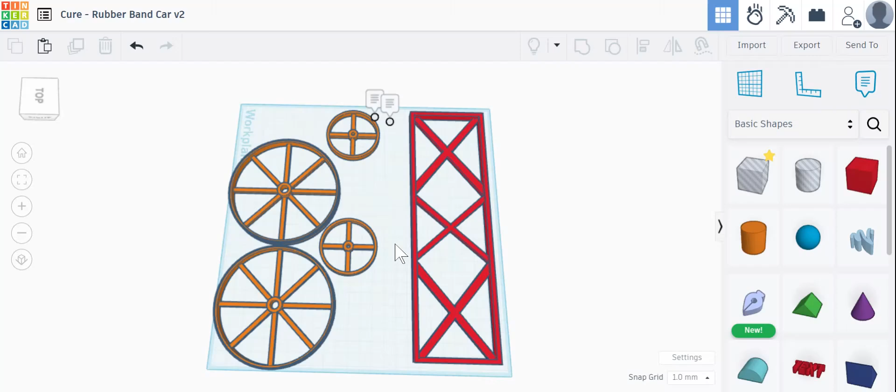Okay, we have our chassis and our wheels. Now we are going to make axle holes and axles. This is where our notes come in important, because the front is 4 millimeters and the back is 8 millimeters, and we need to make the axle holes through the chassis 1 millimeter bigger than those.

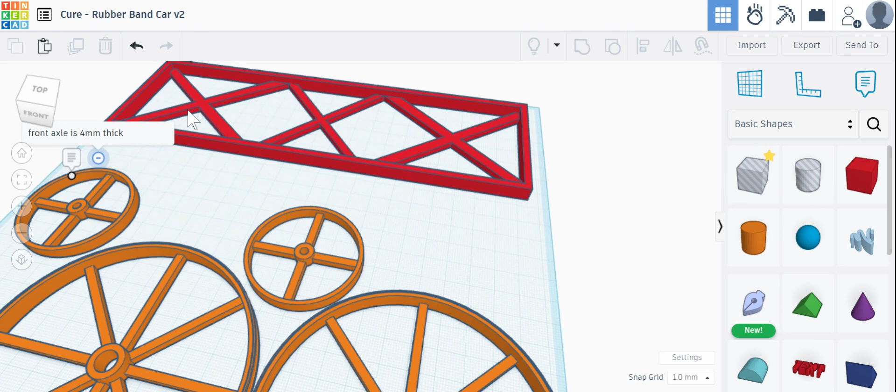We're going to add a little spot in the back so the back wheel axle is a little higher. This way our hook stretches across a little higher, so it's out of the way of the frame when we are twisting up the rubber band car. So let's do a sketch.

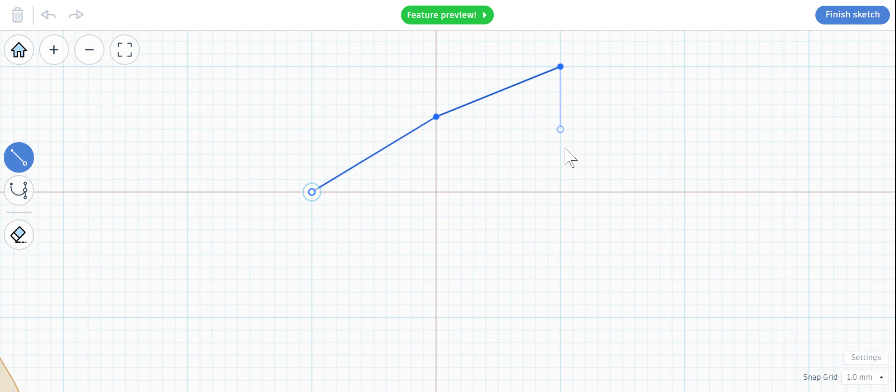We'll come in here. I'm going to use this, if my snap grid's set to 1, okay. So we'll do something like this for the back. We can use this little tool here, click on the line and make it... oh, I don't want that. Let's do Control Z. Stretching it weird, okay never mind. We'll just go ahead and do this, stretch it here, that's what I wanted.

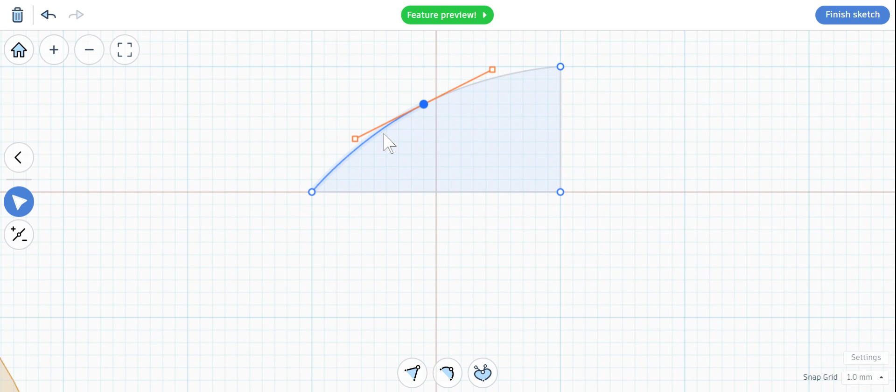So click that center vertices and then you'll stretch it out. Finish sketch. Cool, now we have this shape.

This can go on the back. If you guys remember from the other videos, the edge of this is 3 millimeters thick, so we're going to make this 3 millimeters tall, and then we're actually going to flip it 90.

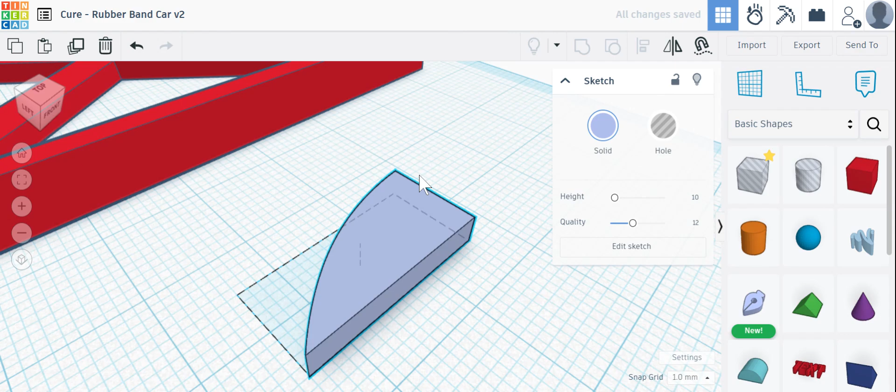I press D so it's on the build plate. This is 7 tall, check over here, 7 tall, which means this is going to go up 7, so we can drag it up 7 millimeters.

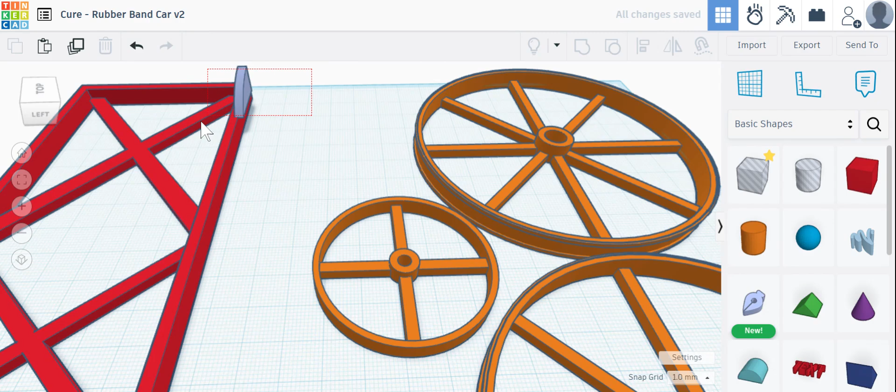And then we're actually going to, I think if we do this, click both, hit F so it's centered, zoom in over here, hit L, line it up with this edge and line it up with this edge. All right, now we have it lined up in that back corner, which is a nice spot for the axle to go.

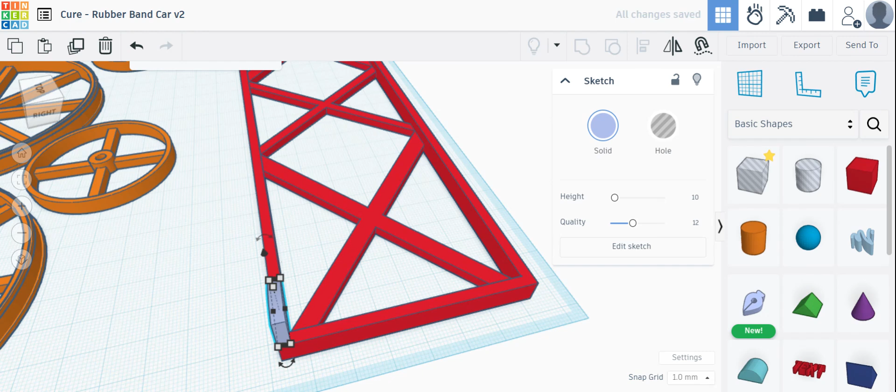The other thing we're going to do is Control D to duplicate this, use my arrow keys to slide another one across there. First, I'm going to group this.

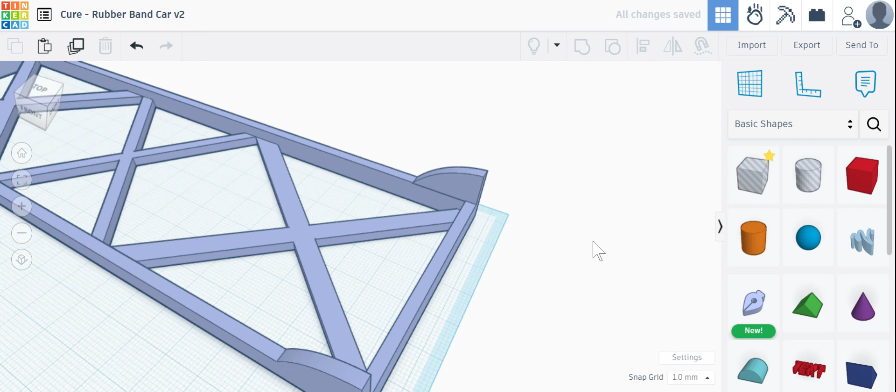Let's do it this way, just so we know for sure it's lined up. Then I'm going to hit L, hit on that edge and on this edge, so now we know it's on that back corner. Group them. Perfect. Now we have a spot for our back axle hole to go through.

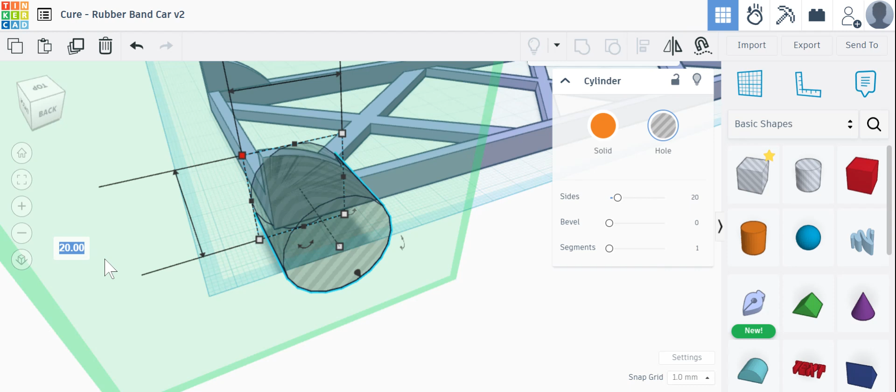So we're going to grab a cylinder that's a hole actually, and we're going to set it here. Doink, right there. We want this, I hit F so we can center it here. Slightly bigger - our back axle is 8 millimeters, so we want this to be 9. Tab, 9, Enter. We can go ahead and move this maybe right there.

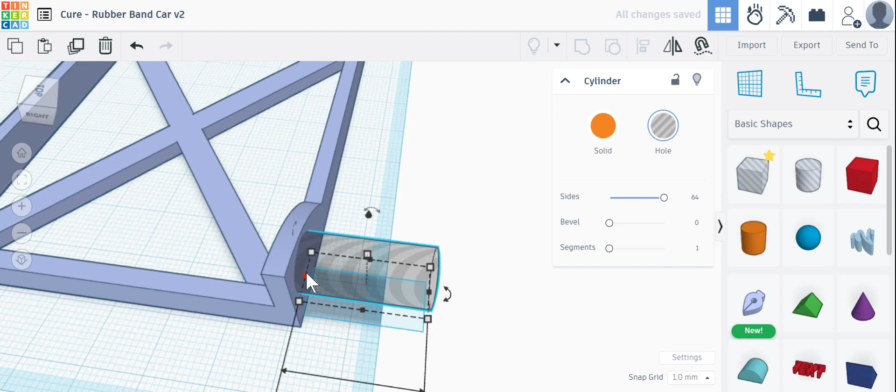There's no real specific spot, it's just whatever looks good. Okay, we click off of it, and then we want to make sure the sides are 64, and then we want to drag that through. That looks good, and then we'll go ahead and group those.

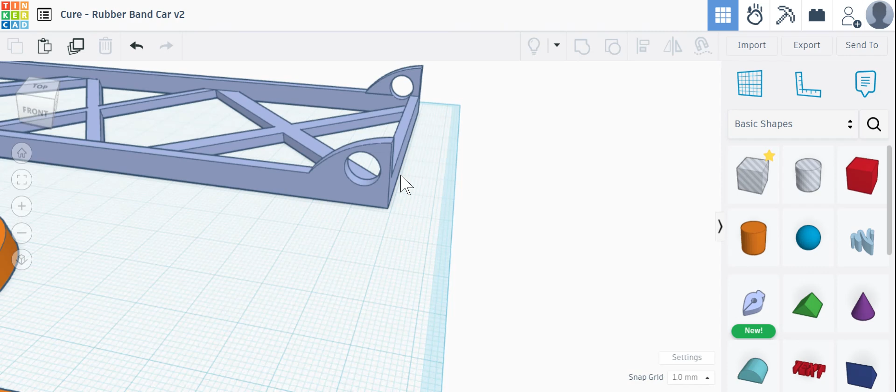So now you have a back hole for where your axle could go. It could be a bigger thing, this is totally fine, it's just where the axle is going to spin. It should be 9 millimeters because it's going to be bigger than the back axle itself.

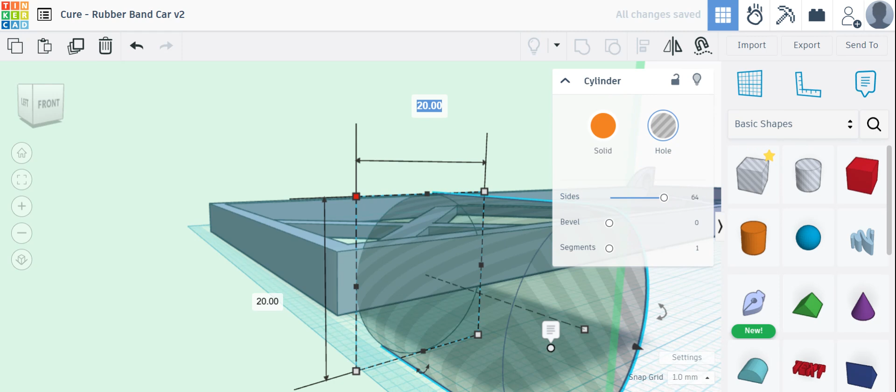Perfect, and then we can go hit F, come up to the front. We could do a little piece up here for our front axle, or you could just take the front axle and throw it through the car somewhere here. We'll switch the sides to 64, which is what I'm going to do. The front axle is 4 millimeters, so we're going to make this hole 5, so it rolls through just fine.

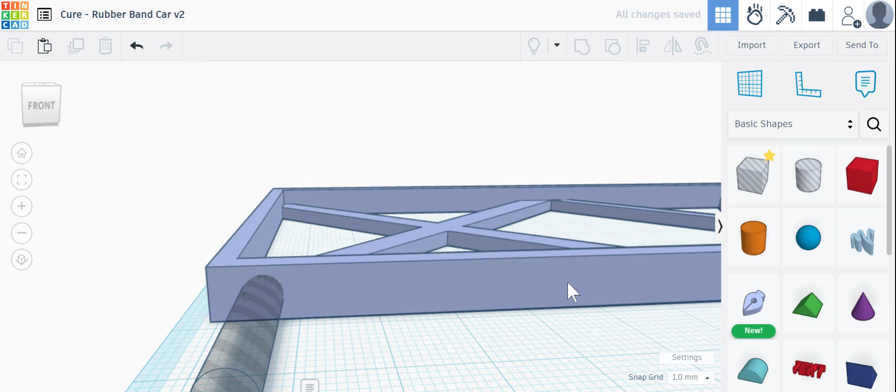And the way I'm getting this plane is when you click this, if you just drag it to the shape and where you want it to go, it'll choose that as the plane it's going into. That's how it ends up on the side. Normally we've been dragging out the pieces just like this.

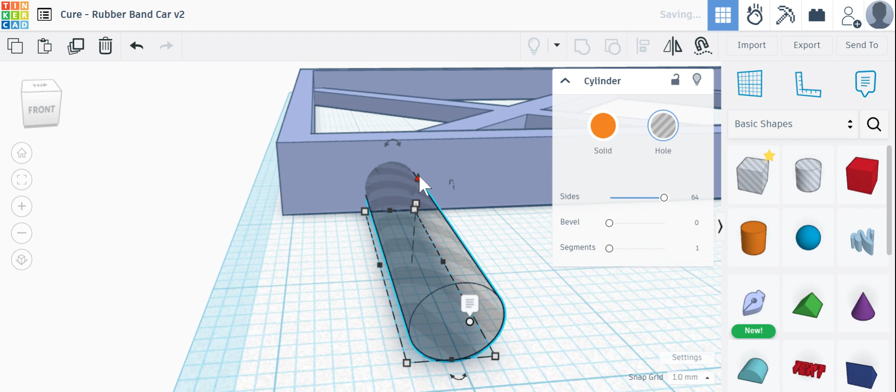Anyways, we got a spot for the front axle to go through, which is fine by me. We could, if you wanted, maybe move this a scooch forward. I'm gonna hit D, see where we're at on the build plate. I know this is 7, this is 5, so I'm gonna just come up 1, so that way I know it's centered between the top and the bottom. So it's 5, 7 total, so there should be 1 millimeter, 1 millimeter. That might be a little thin, but we'll try it, we'll see how it looks.

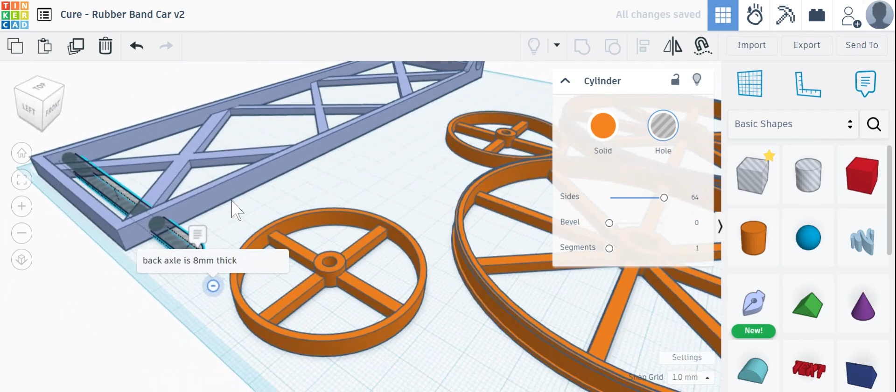All right, squeeze it through. It doesn't matter if we're cutting out. Well, yeah, here's what we're gonna need to do. Here's where I don't like it. We're going to change that. I don't want it to cut through our chassis frame there, so we'll lose some structure.

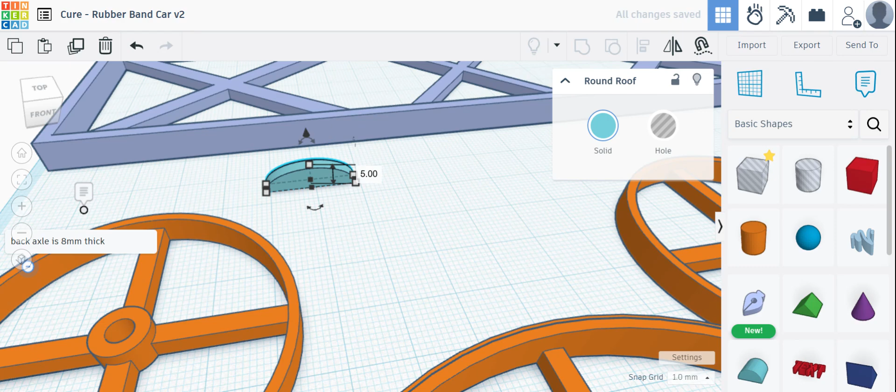So let's go ahead, let's do a semicircle on the front. So semicircle, we'll make it 10 high, 20 wide, and then we'll make it a width of 3. We could even make it shorter if you want, maybe make it 5, just to give ourselves a little bit more space. We're going to drag it up to 7, which is the height of the chassis.

We're going to go ahead and select what should be 2 pieces. We're going to hit L, and we're going to line it up in these front corners, here and here. There we go. We're going to drag both. Oh, sheesh, okay, now we're going to have to do that again. Whoopsies, let's not do that again. Grab those 2, Control G to group them.

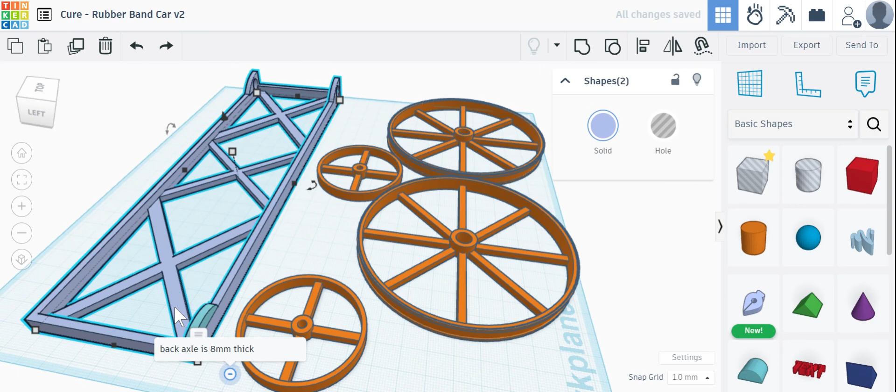Just trying to get a better angle here, sometimes they get all mixed up with the way things look. Okay, we're going to ungroup it for a second. Control D, duplicate, I'm going to slide this over. It should, in theory, line up right on that corner.

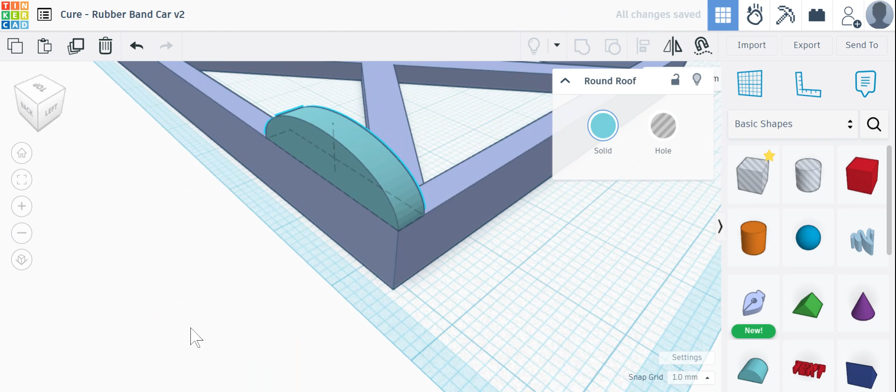Cool. Now we're going to group it. Now I'm going to go back to my axle hole. All right, coming back. Boom. We go 5, 5.

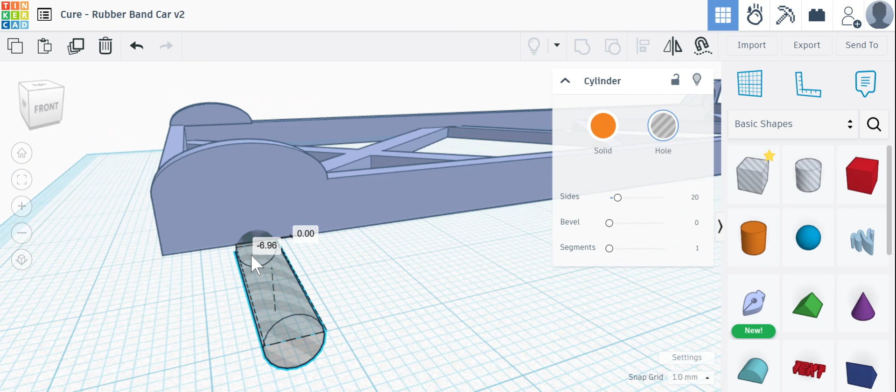This is going to be a little higher now, let's try and kind of center it here. Even a little higher is probably fine. Cool. Whatever looks good.

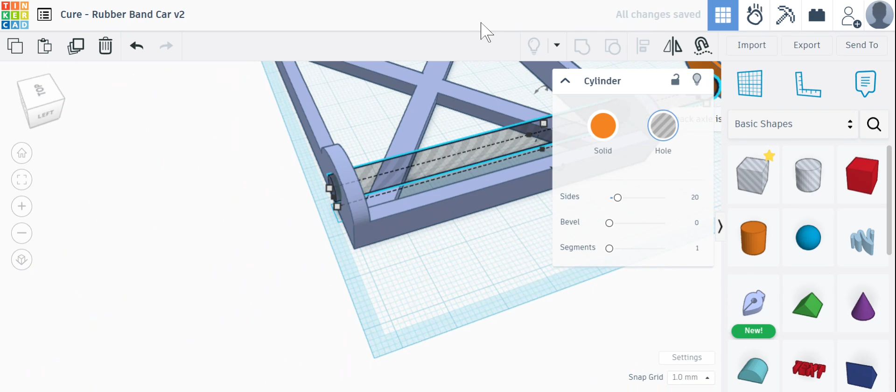Drag it all the way through the other side. Make sure it's through. Grab both shapes, should be 2 shapes. Group it. Now you got your axle holes.

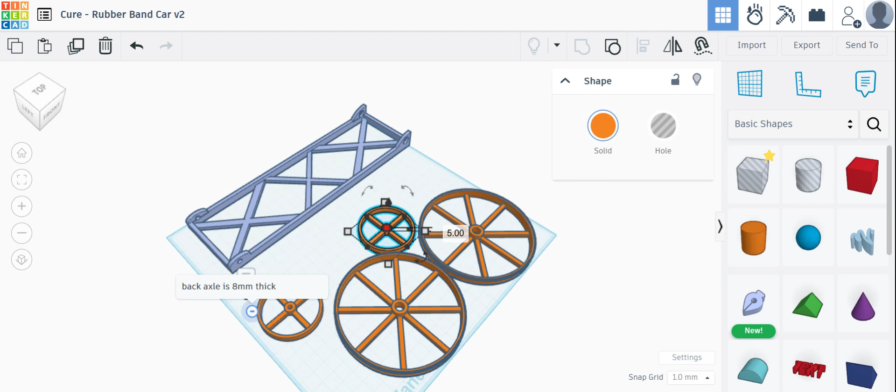Okay, now all that would be left would be to make the axles. So we know the width is 70. The front wheel is a height of 5. So 5, 5, and 70 is going to be 80. We want about 1 millimeter to our space. So we're going to make the back axle, remember, 8 millimeters thick.

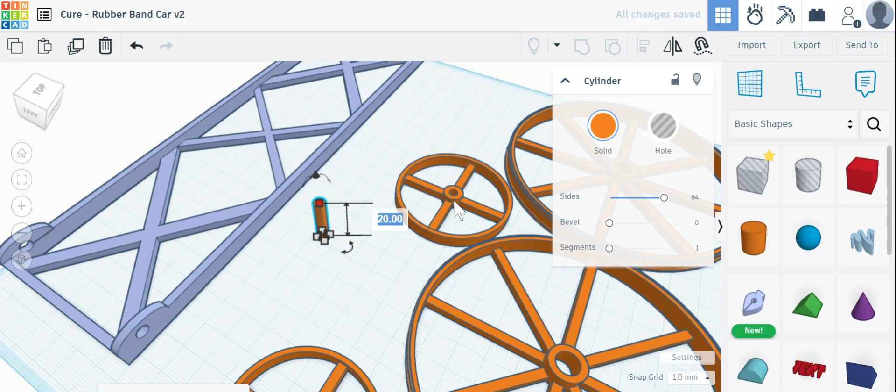So we're going to pull out a cylinder, go to 64 sides, it's going to be 4 by 4. And this height, we're going to make it, it's 80. We'll go 82, which would put us at the width of the car through the wheels and then give us a little bit of extra space so the wheels are spinning freely through the axle hole. Remember, this hole should be 5. This width is 4, so it'll tightly fit on the wheels, but it'll spin through this frame.

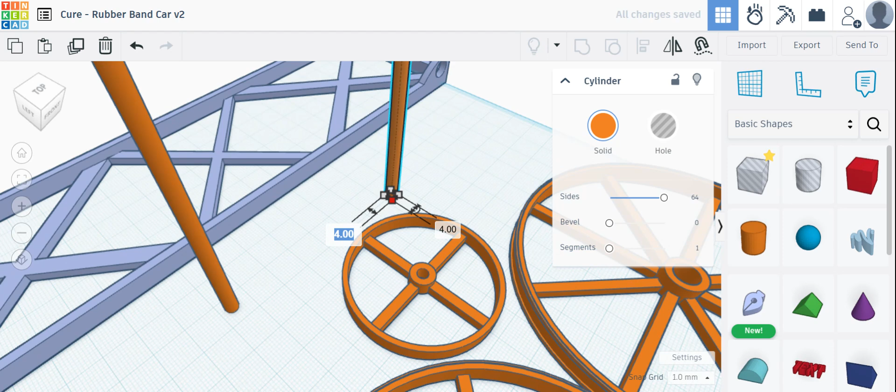For the back axle, we're going to go 8 millimeters, we have it in our note over here. So it's going to be slightly different though, because these, I think we made 7. So 7 plus 7, that's going to be 84. Plus 2 more, we'll say is 86. Then we need to change the thickness to be 8 by 8. We want this to be stronger.

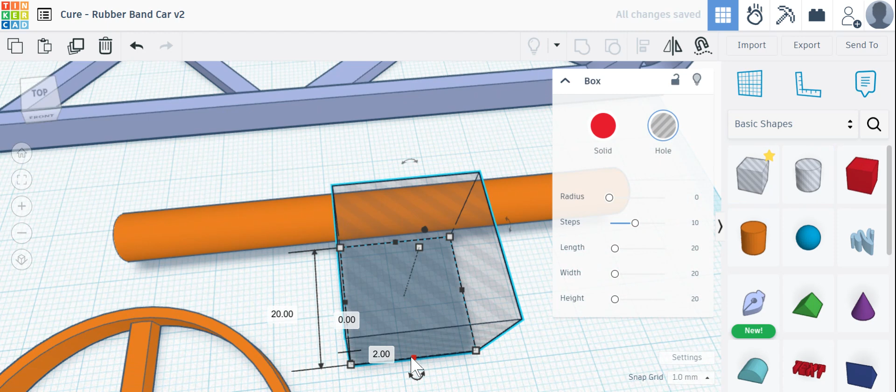The other thing we've kind of figured out is we're going to flip this actually 90 real quick, drop it to the ground. There's something we want to do. We want to put a zip tie through here, so there's a spot for the zip tie to kind of go through. So we're going to make a little 2 millimeter, maybe we'll do by 1, or by 1 centimeter.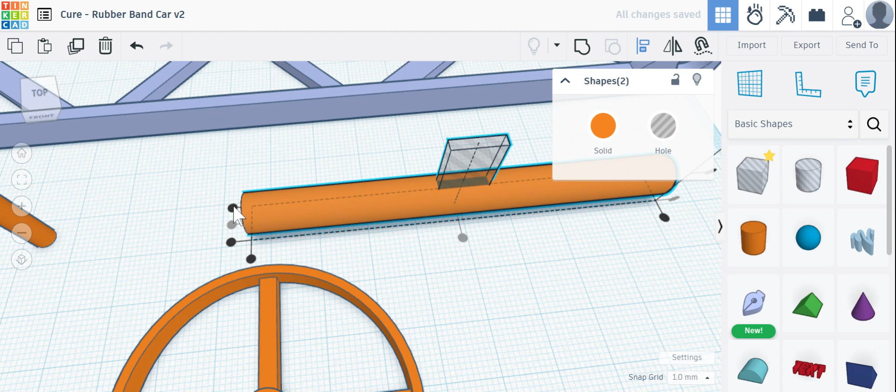And then we're going to grab both these shapes, hit L, center. So we centered it there, centered it here. Now we're going to group those 2 shapes, and this is actually going to give us a spot for the zip tie to go through.

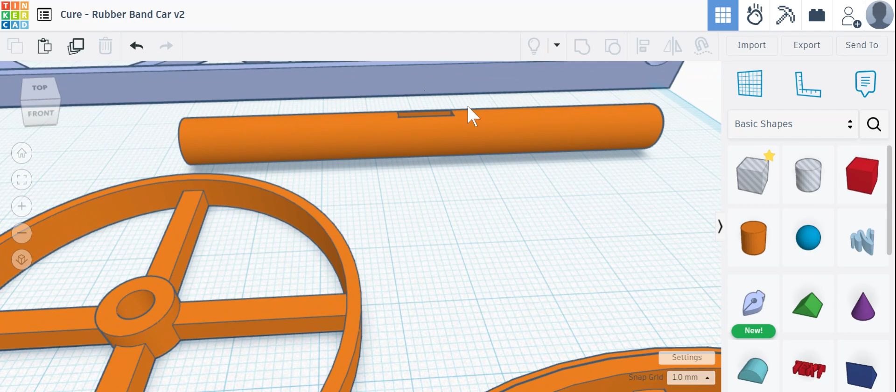So the zip tie isn't just spinning when the rubber band is pulling on it. We'll use the little notch on the zip tie to hook our rubber band around. Our rubber band will hook around this, and we'll build up all that tension to get the rubber band going, stretched out.

But we do need to flip it back, so we'll flip it back 90 degrees, hit D so it's on the build plate. That way we can print it easier—it doesn't print as well in the other direction.

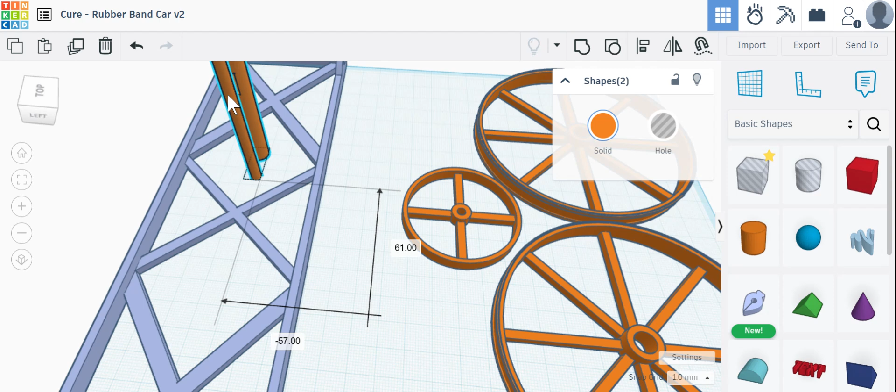So now we have our front and back axle. And remember, if we fit these things closer, you can actually throw these in the center here, because that'll save us space on the build plate. The closer everything is, the faster it will print, because the tool head doesn't have to move back and forth as many times.

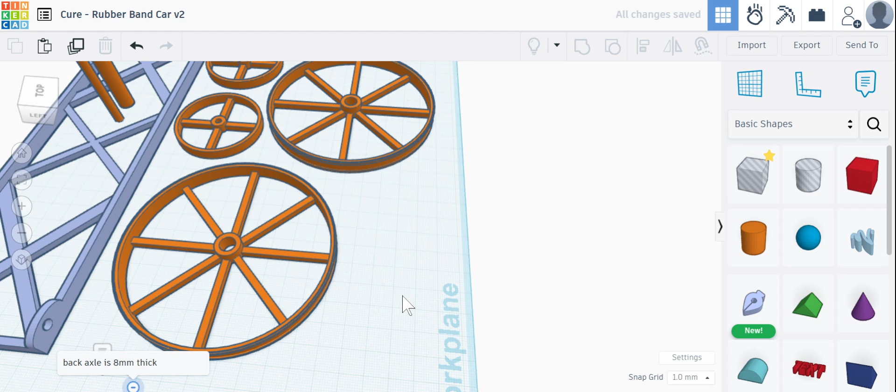So you can put it closer, kind of tightly together, so the tool head doesn't have to go all the way across the build plate and back. It just saves a little bit of time, which is helpful—saves some work on the printers, so the printers last longer, etc.

Okay, we can delete these notes if we want. I'm going to hit delete, delete, delete. Get out of my life. There you go. Alright, just move them out of the way. Now we have our things.

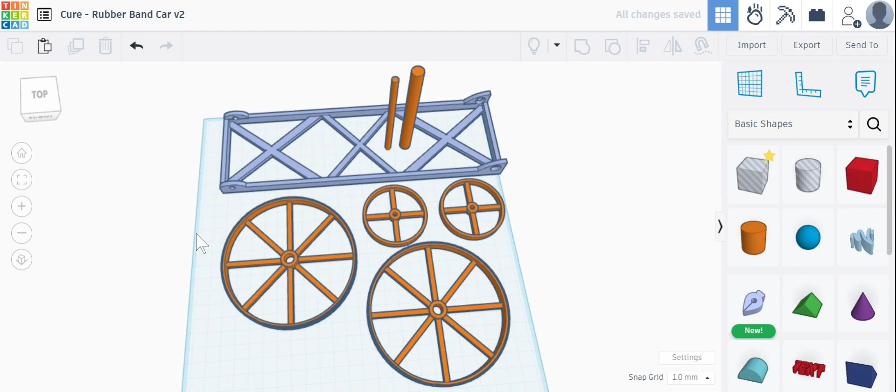The last thing we're going to need is a little hook. There's a bunch of ways you could do a hook. The easiest is we want to do some sort of 45-degree angle shape.

So we can go ahead and throw it there. I'll just pull the triangle out. Let's make it like 0.5 centimeter. Maybe make this 15. Sure.

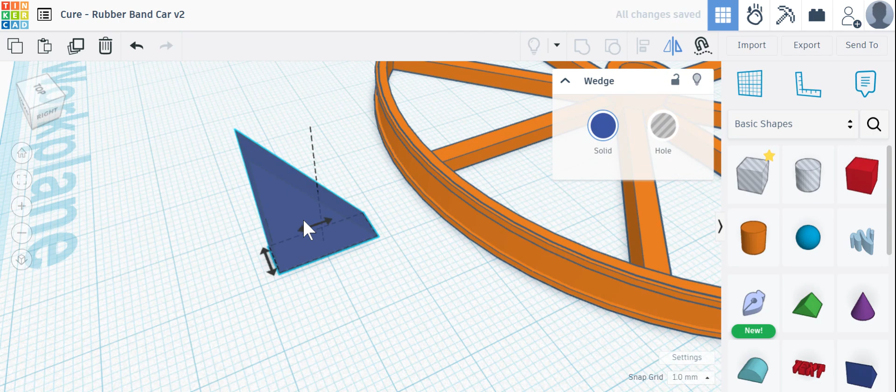Okay, now we're going to actually just go Control Duplicate, hit M, and we're going to mirror it vertically. Okay, hit M—well, you'll mirror it this way, actually. Oops, I guess I didn't hit D. Control D, M, mirror it this way. Where's my vertical duplicate? Mirror it that way. Cool, slide this over.

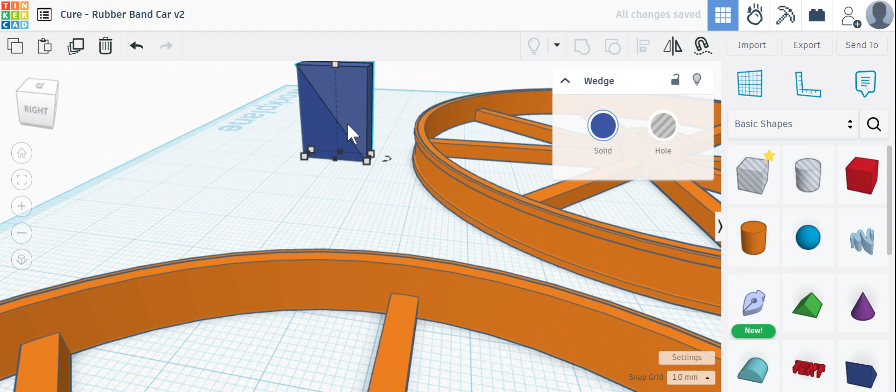And that actually works as a fine hook. Then Control G, group it. So that could be a hook, if you want just something like that.

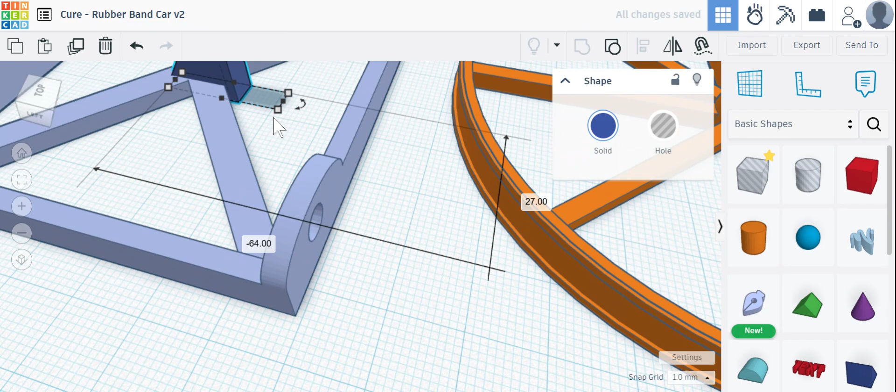So we have the thing hooking on here, so it prints easy. Let's turn it 90 so it's sitting in there. If you want, you could just have it like that.

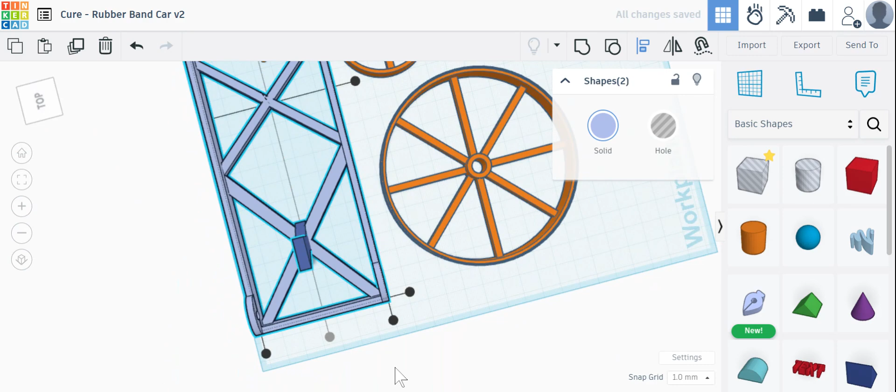Okay, let's go L. Oof—are you going to make me do it that way? Really? We'll center it there. Okay, that looks pretty clean. That's a nice spot for the hook, so it's attached to the little frame.

It can hook on up here. That's where our rubber band from the back axle, going around the zip tie, will hook on. It'll stretch out, building up tension. You could put it forward more if you wanted—I think the more forward we have it, the more tension we can build. So if you want to do that, you can.

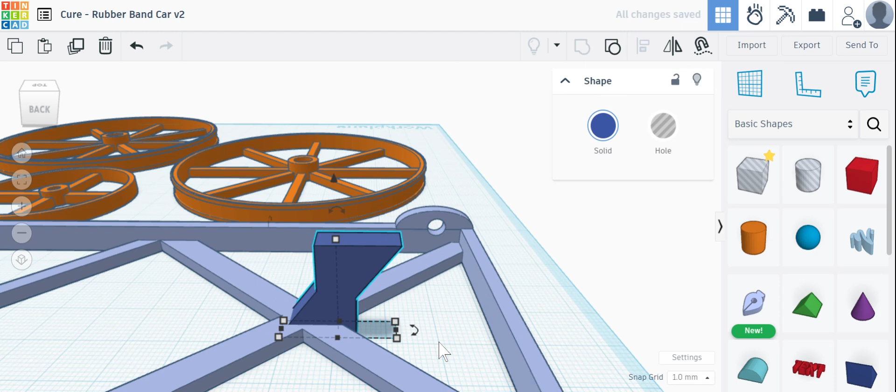But that works. Let's go ahead and group those. So we should be done—that's the end of our car.

Once we print this, we put it all together. Put our zip tie through the back axle, stretch it out, put our rubber bands on the back so we have a little tire traction. We should be good to go.